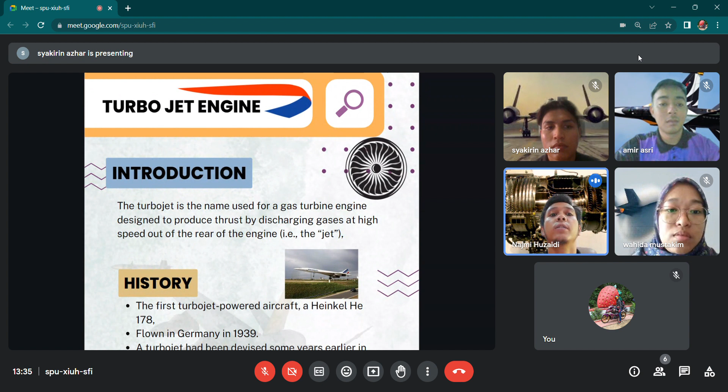What is a turbojet engine? A turbojet engine is an engine made of a turbine to change air compression in the engine. It's designed to produce thrust from the air intake to the nozzle with high speed air out.

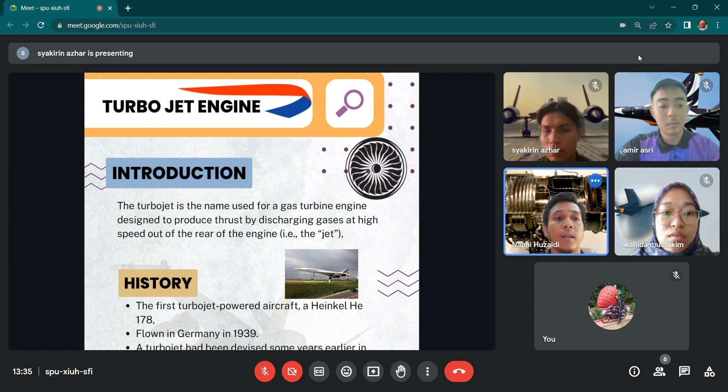For the history of the turbojet engine, the first turbojet engine was built, the Heinkel He 178, and it flew in Germany in 1939. It had been devised some years earlier in England by Sir Frank Whittle. The first flight using his engine did not take place until 1941. During the 1960s, it came into common use.

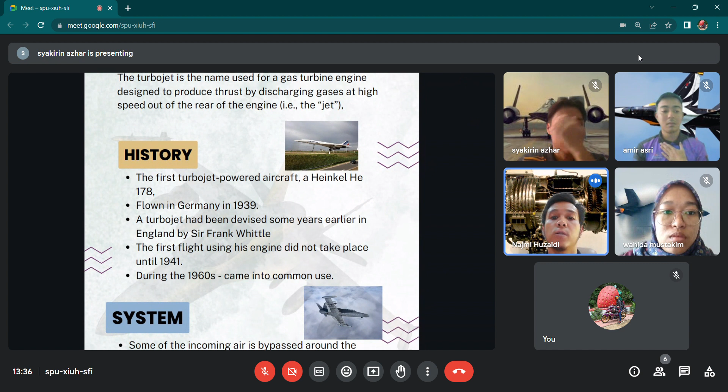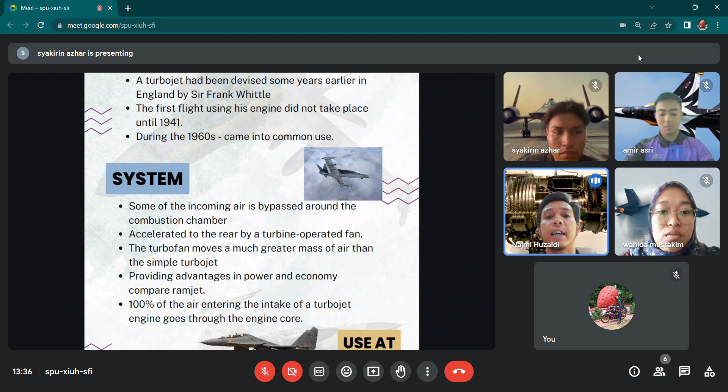For the system of the turbojet engine, firstly air comes inside the engine from the intake at the front, and it will accelerate by a turbine from the operated fan. This system engine provides advantages in power and economy compared to ramjet engines.

What is different between a ramjet engine and a turbojet engine? A ramjet engine does not have major moving parts in its engine, but the turbojet engine has major parts such as a big turbine to make high speed air come out the exhaust or nozzle.

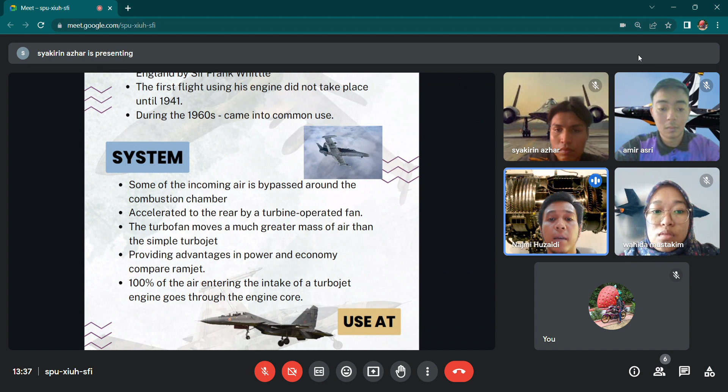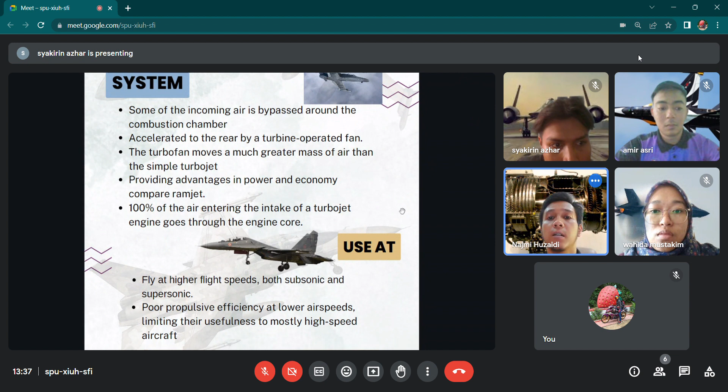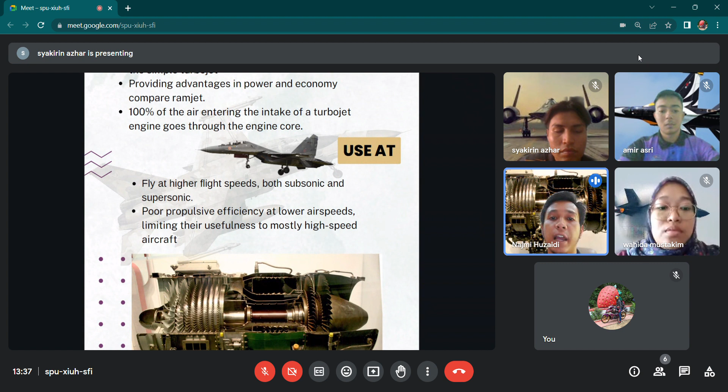For the turbojet engine system, 100% of the air entering the intake of a turbojet engine goes through the engine core. It's more useful for high flight speed, subsonic and supersonic, but this engine has poor propulsive efficiency at lower speeds, which limits their usefulness to mostly high speed aircraft.

That's all for the introduction to the turbojet engine. I will let my friend continue the presentation.

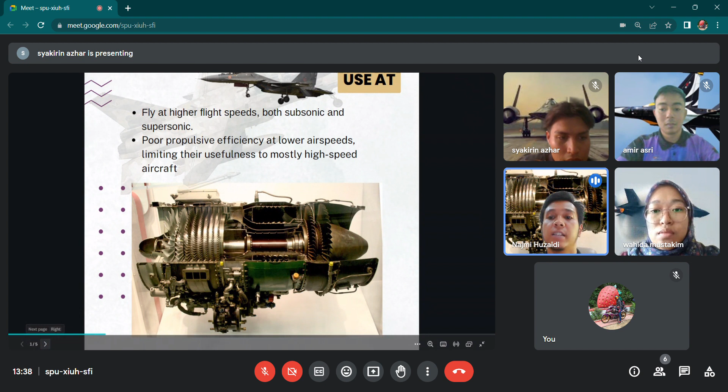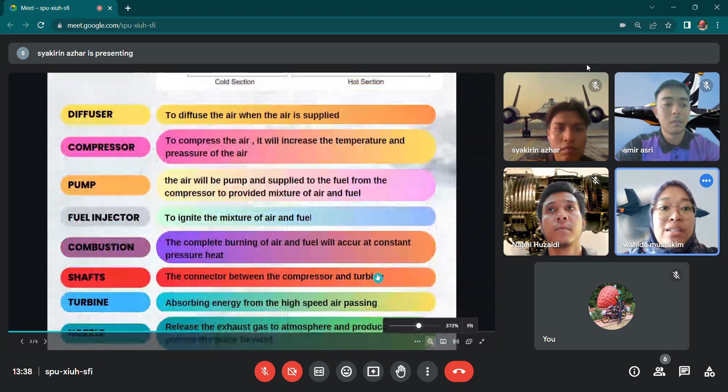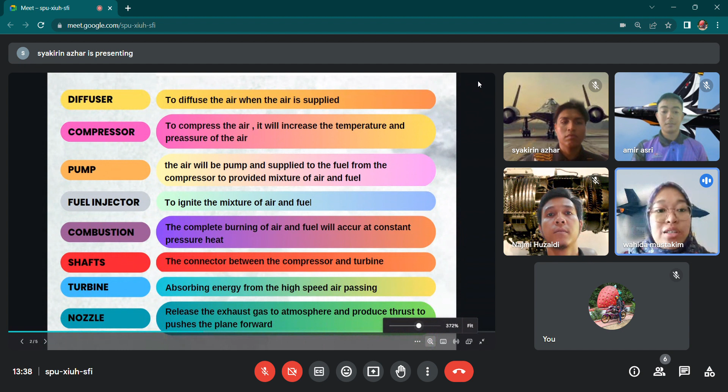Now I will present the design of the turbojet engine. First of all, there are 8 important components, which are the diffuser, compressor, pump, fuel injector, combustion, shaft, turbine, and nozzle. In the design of the turbojet engine there are 2 sections, the cold section and the hot section.

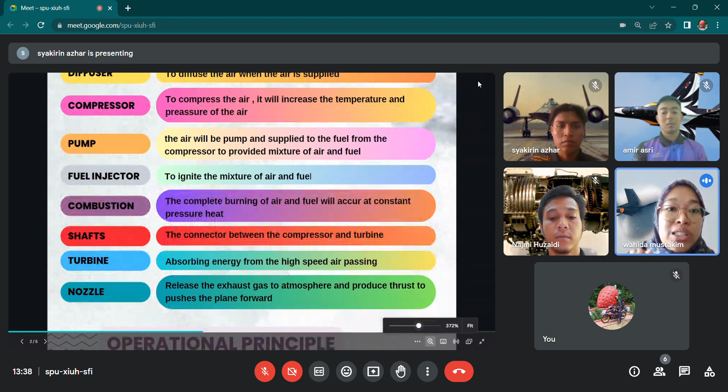What is the function of the diffuser? Firstly, it's to diffuse the air when the air is supplied. What is the function of the compressor? To compress the air, which will increase the temperature and also the pressure of the air.

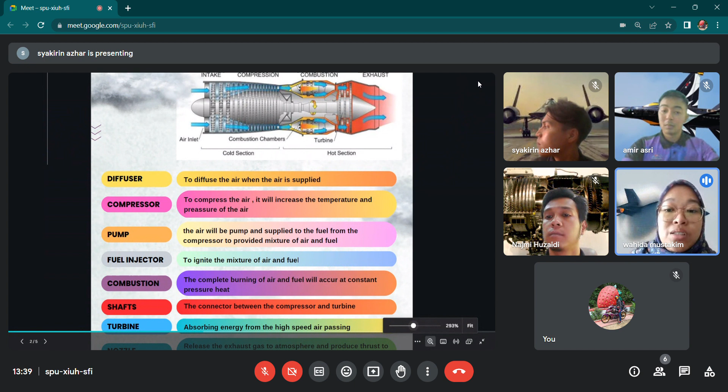What is the function of the pump? The air will be pumped and supplied with fuel from the compressor to provide the mixture of air and fuel. The fuel injector is to ignite the mixture of air and fuel. Combustion is the complete burning of the air and fuel, which occurs at constant pressure and heat.

The shaft is the connector between the compressor and the turbine. The turbine absorbs energy from the high speed air passing through. The nozzle releases the exhaust gas to the atmosphere and produces thrust to push the plane forward.

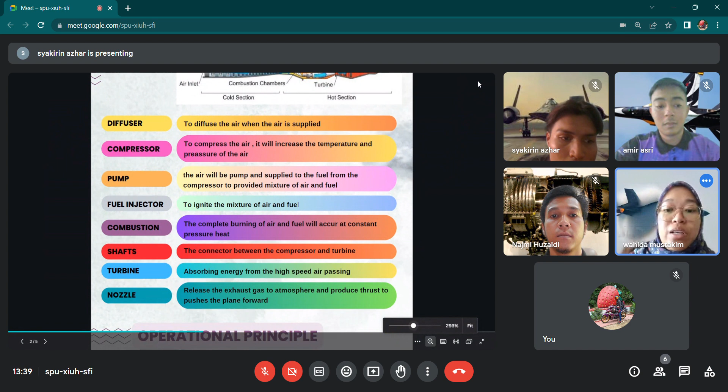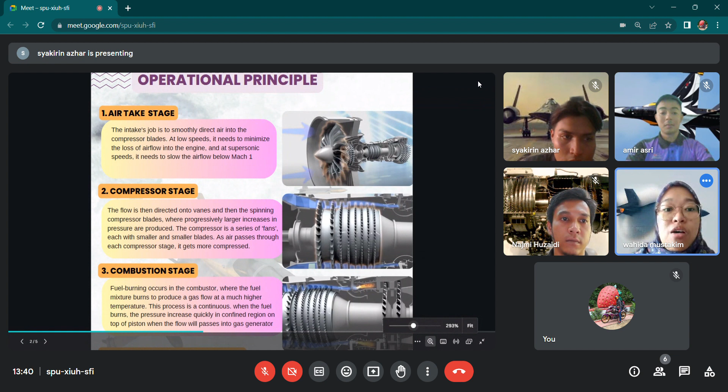Now I will explain the operational principle of the turbojet engine. There are 5 stages: first is the intake stage, second is the compressor stage, third is the combustion stage, fourth is the gas generation turbine stage, and fifth is the exhaust stage through the nozzle.

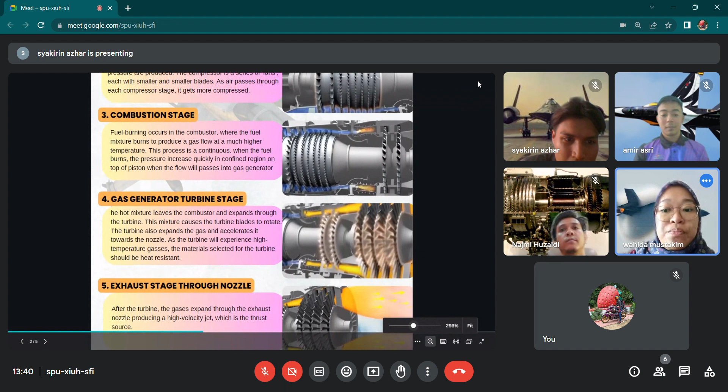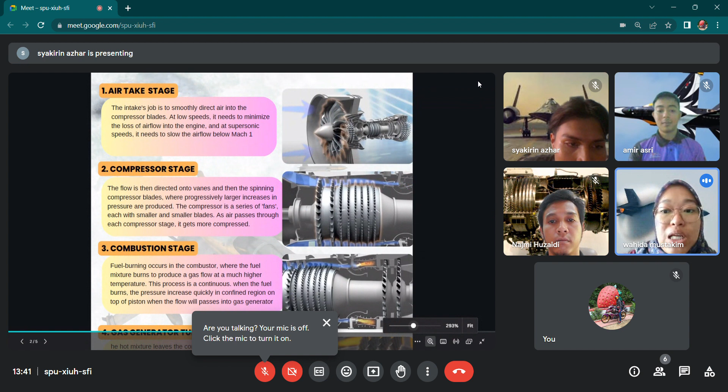At the compressor stage, the flow is directed onto vanes and then the spinning compressor blades, where a progressively large increase in pressure is produced. This means that when large pressure is produced, the temperature is increased. The compressor is a series of fans.

When the air is passed through each compressor stage, it gets more compressed. After the air passes through the compressor stage, it will go to the combustion stage. At this stage, the air will mix with the fuel and start burning to produce gas flow at a much higher temperature.

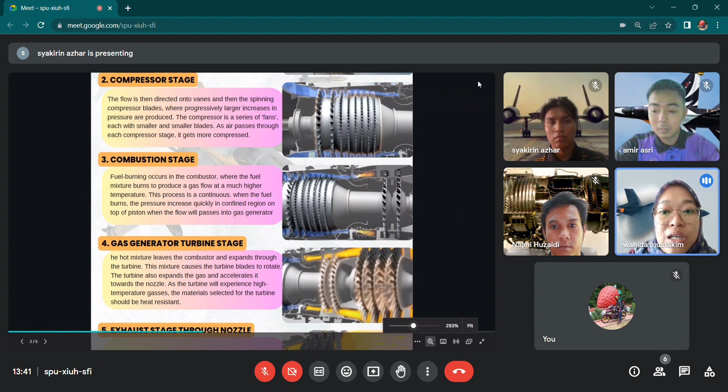This process continues as the fuel burns and the pressure increases quickly in the confined region, and the flow will pass into the gas generator.

At the fourth stage, which is the gas generator turbine, the hot mixture of fuel and air will leave the combustor and expand through the turbine. As the mixture passes through the turbine blades, they will rotate and also expand the gas, accelerating it toward the nozzle.

The turbine will experience high temperature gas. The material selected for the turbine should be heat resistant.

After the gas generator turbine rotates, it will go to the exhaust stage through the nozzle. As the gas passes through the turbine, it will expand to the exhaust nozzle, producing a high velocity jet, which is the thrust that moves the jet forward.

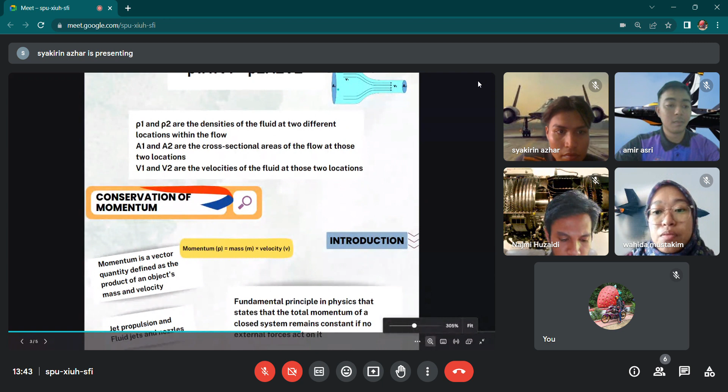I will explain the working principle used by the turbojet engine system, which is first the conservation of mass. For introduction, we know that conservation of mass is a fundamental principle in physics and chemistry that states the total mass of a closed system remains constant over time, regardless of any physical or chemical change that may occur within the system. This principle is also known as the law of conservation of mass.

For point number 1, mass cannot be created or destroyed. According to the conservation of mass, mass cannot be created or destroyed; it can only be rearranged or transformed into different forms. This means that in any physical or chemical process, the total mass of the reactants must be equal to the total mass of the products.

For point number 2, this closely relates to the concept of conservation of energy, as declared by the law of conservation of energy. Together, these principles form the foundation of the law of conservation of mass and energy, also known as the law of conservation of mass-energy.

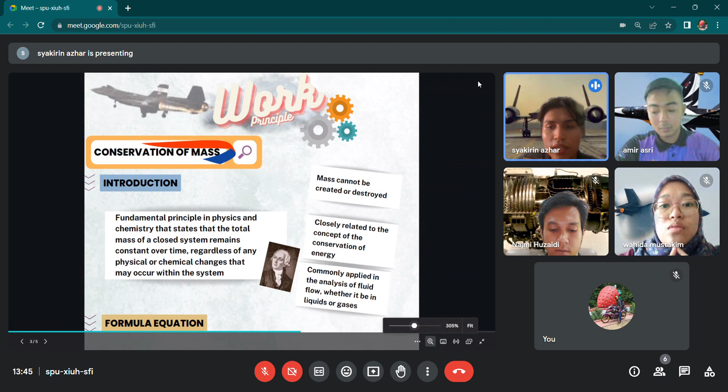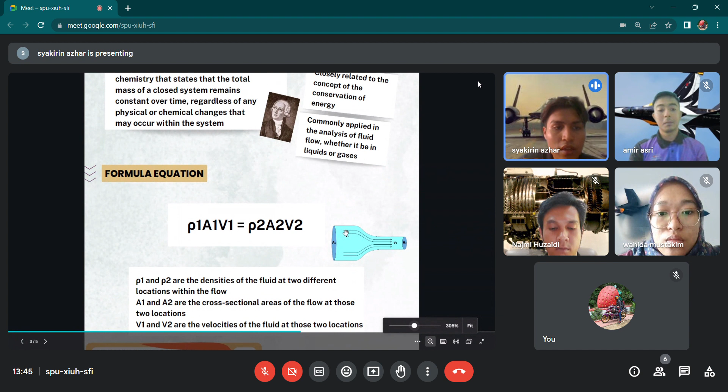We can see the formula for conservation of mass: Rho1 A1 V1 equals Rho2 A2 V2. Rho1 and Rho2 are the densities of the fluid at two different locations within the flow, A1 and A2 are the cross-sectional areas of the flow at those two locations, and V1 and V2 are the velocities of the fluid at those two locations.

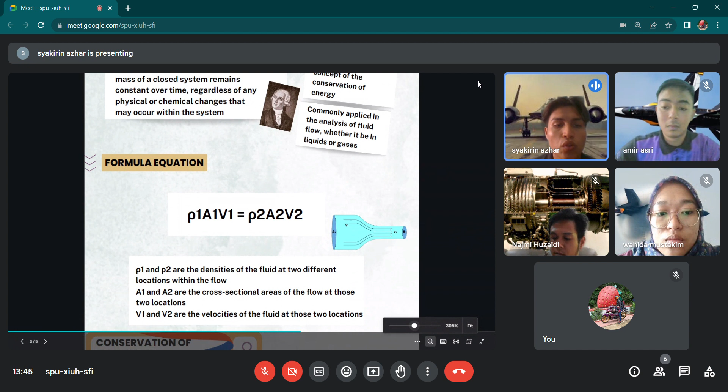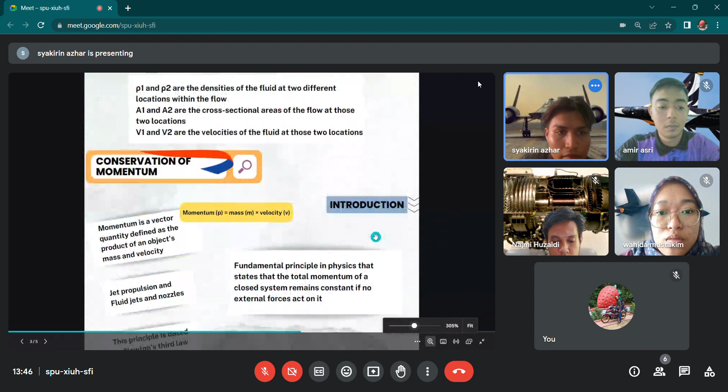For the second working principle of the turbojet engine system, which is conservation of momentum: the conservation of momentum is a fundamental principle in physics that states the total momentum of a closed system remains constant if no external force acts on it. In other words, the momentum before an event or interaction is equal to the momentum after the event.

The first point, momentum is a vector quantity defined as the product of an object's mass and velocity. The momentum before an event or interaction is equal to the momentum after the event. We use the formula: momentum equals mass multiplied by velocity.

For the second point, the conservation of momentum is a fundamental principle in fluid mechanics, and it plays a crucial role in understanding and analyzing the behavior of fluid in various applications. For point number 2, there are a few examples of how conservation of momentum is applied in fluid mechanics: jet propulsion and fluid jets and nozzles.

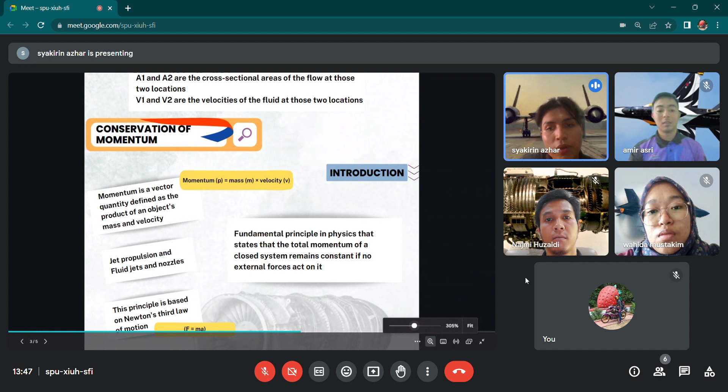In the field of jet propulsion, such as aircraft or rocket engines, the conservation of momentum is essential. For fluid jets and nozzles, the conservation of momentum is utilized to understand and predict the behavior of fluid jets and nozzles, for example in applications like fire hoses, water sprinklers, or jet injectors.

And for the last point, point number 3, the principle is based on Newton's third law of motion, F equals ma.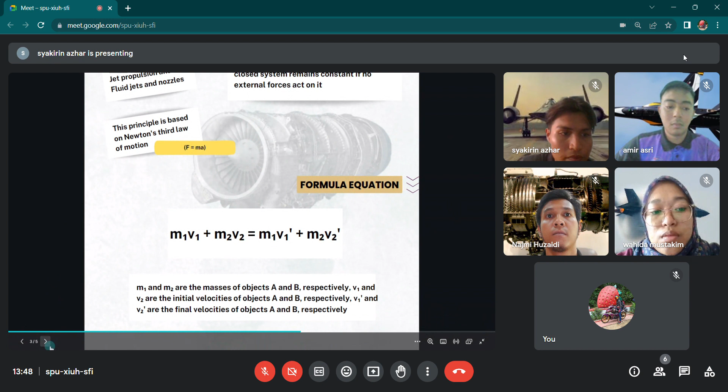The third work principle in the turbojet engine system is the Bernoulli principle. Bernoulli principle is a fundamental concept in fluid dynamics that relates the speed of a fluid to its pressure. It states that as the speed of a fluid increases, the pressure exerted by the fluid decreases, and vice versa, assuming the fluid flow is steady and there is no energy loss due to friction or other factors.

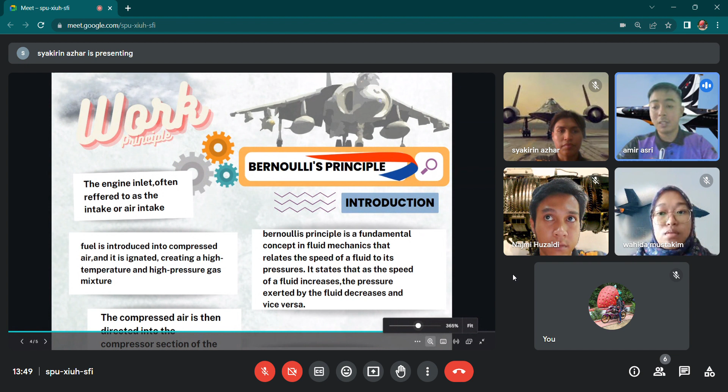This higher pressure air is then directed into the next stage of the engine. As the air passes through the compressor blades, its velocity decreases and the pressure increases due to the Bernoulli principle. The pressure at the nozzle exit is lower than the surrounding atmospheric pressure, creating a pressure difference that generates the forward thrust needed to propel the aircraft.

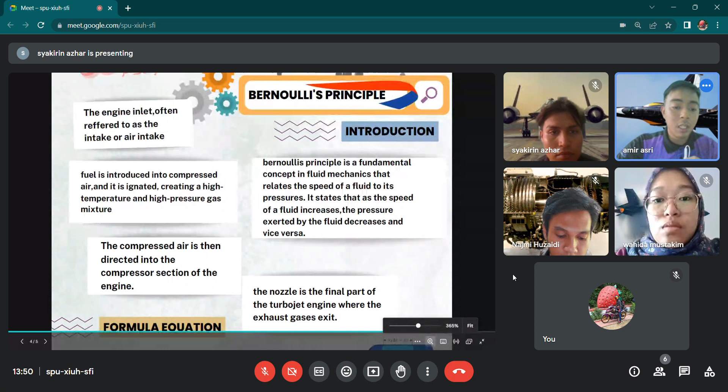There are four stages in the engine jet system. The first is the engine inlet, often referred to as the intake or air intake. Fuel is introduced into the compressed air and ignited, creating a high temperature and high pressure gas mixture. The third is the compressed air directed into the compressor section of the engine. And the last is the nozzle, the final part of the turbojet engine where the exhaust gases exit.

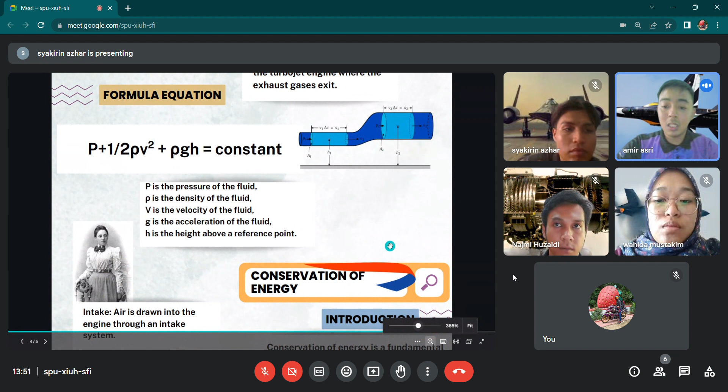Formula equation. The Bernoulli equation is a fundamental equation in fluid dynamics that describes the conservation of energy for a fluid flowing in a steady, non-viscous, incompressible manner.

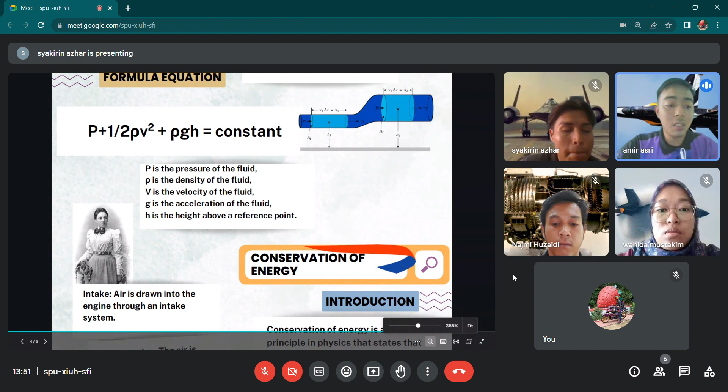P plus one over two rho V squared plus rho GH equal to constant, where P is the pressure of the fluid, rho is the density of the fluid, V is the velocity of the fluid, G is the acceleration of the fluid, and H is the height above a reference point.

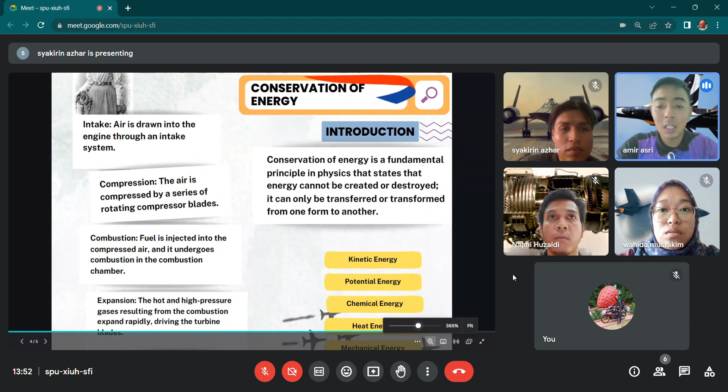The last work principle in the turbojet engine is conservation of energy. The principle of conservation of energy applies to various systems, including the jet turbo engine. A jet turbo engine is a type of combustion engine commonly used in aircraft propulsion. Throughout this process, the conservation of energy is upheld.

This kinetic energy drives the compressor blades, increasing the pressure and temperature of the air. In each step of the process, energy is conserved. The various forms of energy are converted and transferred, but the total amount of energy within the system remains constant.

First is intake: air is drawn into the engine through an intake system. Second is compression: the air is compressed by a series of rotating compressor blades. Third is combustion: fuel is injected into the compressed air and undergoes combustion in the combustion chamber. Fourth is expansion: the hot and high pressure gases resulting from combustion expand rapidly, driving the turbine blades. Fifth is exhaust: the exhaust gases are expelled from the engine at high velocity, creating forward thrust according to Newton's third law.

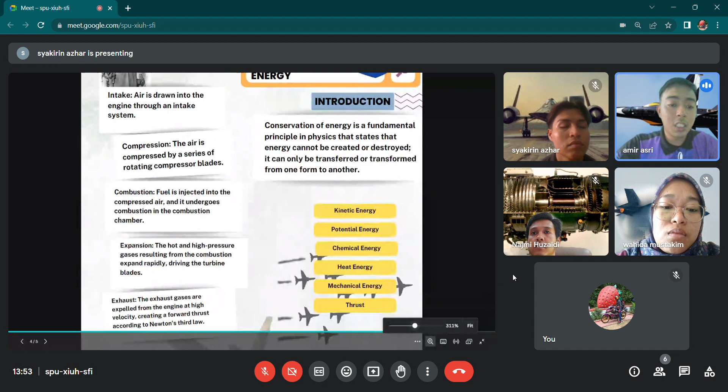There are six kinds of energy in the turbojet engine. First is kinetic energy, second is potential energy, third is chemical energy, fourth is heat energy, fifth is mechanical energy, and the last is thrust.

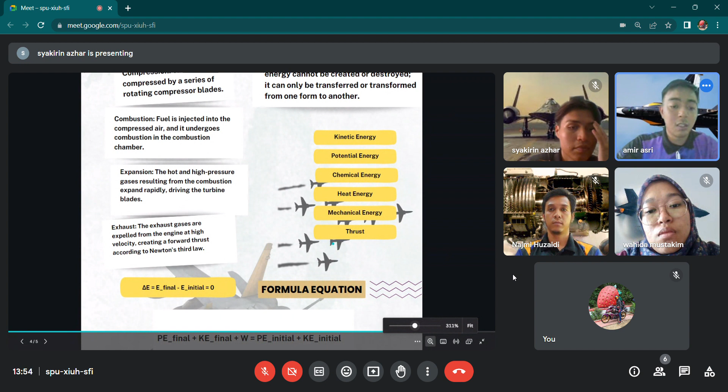For the formula equation, there is a simple formula that we can use to calculate the conservation of energy. The conservation of energy principle serves as a fundamental guiding principle to ensure that energy is accounted for in any given system. PE final plus KE final plus W equal to PE initial plus KE initial, where PE is potential energy, KE is kinetic energy, and W is work.